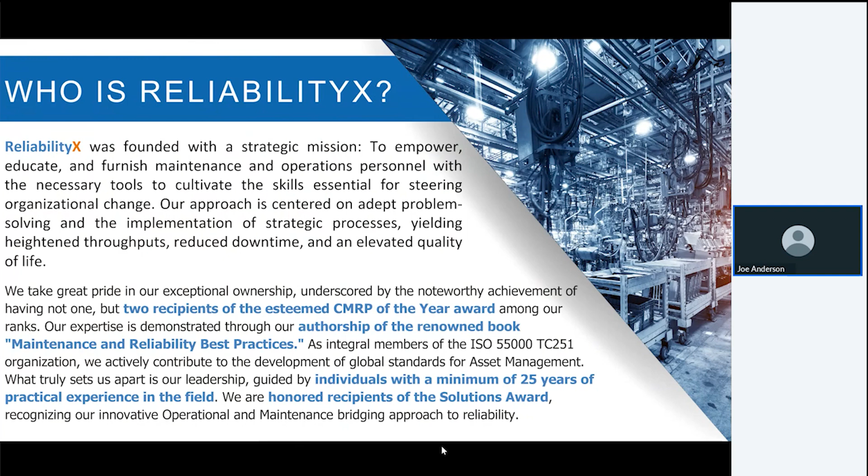So let's jump right into it. When it comes to defining terms, we're not going to solve the world's problems today. Really, you might have more questions than answers. Am I right? I don't know. I'm not claiming to be right. I'm just trying to spark a conversation.

But I think if we use tools that we have at our disposal and years of experience, we can start to see some of the things that we define and the way we define them don't quite add up to the words that we use. And so that's where I kind of want to get. I don't think we'll definitely solve it. And I don't know who's right and who's wrong. Just wanting to have the conversation.

But we've got to understand that in the maintenance and reliability space, we've kind of dug ourselves into a hole with the way that we define things and kind of created our own language and only included ourselves within that language, and that put us in a box. And now anytime we talk about maintenance, everybody only thinks about the maintenance department. And the same thing we did with reliability; now most people think reliability is a maintenance thing. And that couldn't be further from the truth.

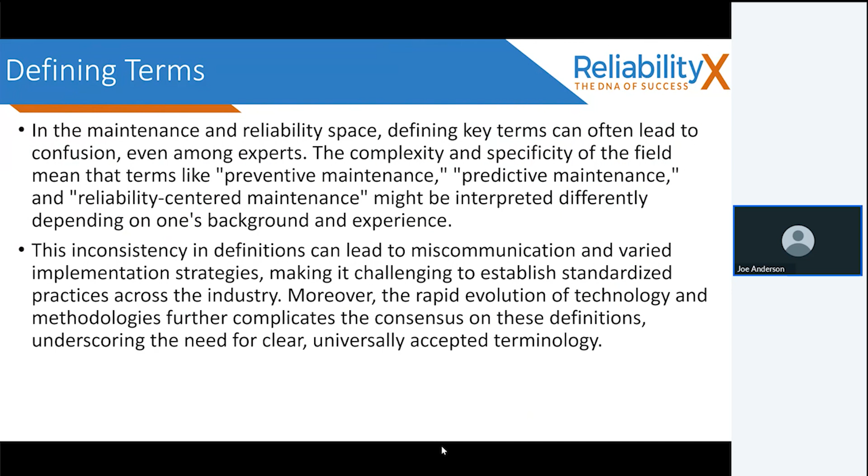And I think we're paying the price for that now, because now the market is saturated with these smart people and they provide minimal value. Not all, I don't want to use it as a blanket term, but most, for sure. And here we are, further complicates things. So again, my theory, the way that I teach it, is these smart people take simple things and make it very complex. And by doing so, that creates bureaucracy, and it stifles an organization's ability to be flexible and move.

And I've seen this now, being on the consulting side, time and time and time again. Value-added people, we take the complex and we make it simple. The reason why KISS, keep it simple, stupid, is a thing is because of common sense. The simpler it is, the easier it is to get results, and the better results you get. And for whatever reason, we're enamored with complexity, which I don't understand. But the goal is keep things as simple as possible, define things in simple terms. Doesn't need to be complex. Go out and execute and get results.

And then yesterday, 2 days ago, I was watching a video by Eli Goldratt. Goldratt wrote The Goal. He wrote Critical Chain, The Haystack Syndrome, some of these books. He taught Theory of Constraints. Phenomenal guy. But he had this quote in this video I was watching, and it kind of made me laugh.

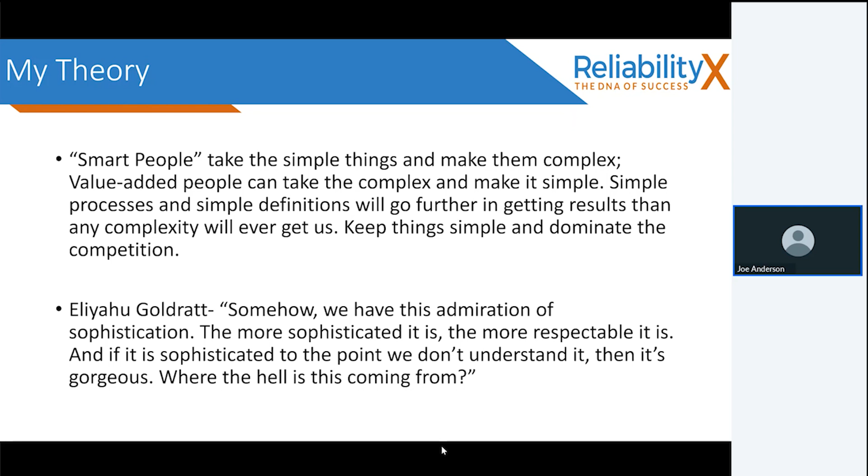So let's get into some terms. First, I'm going to start with a few acronyms. We will define these acronyms. But total productive maintenance, TPM, that is a thing. PDM, predictive maintenance. PCM, precision maintenance. PM, preventive maintenance.

Preventative wasn't a word until about 5 years ago. They added it to the dictionary because we couldn't say preventive correctly.

Corrective maintenance, CM. Time-based maintenance, TBM. Condition-based maintenance, CBM. RCM, Reliability-Centered Maintenance. FMEA, Failure Modes and Effects Analysis. OEE, Overall Equipment Effectiveness. And TEEP, Total Effective Equipment Performance.

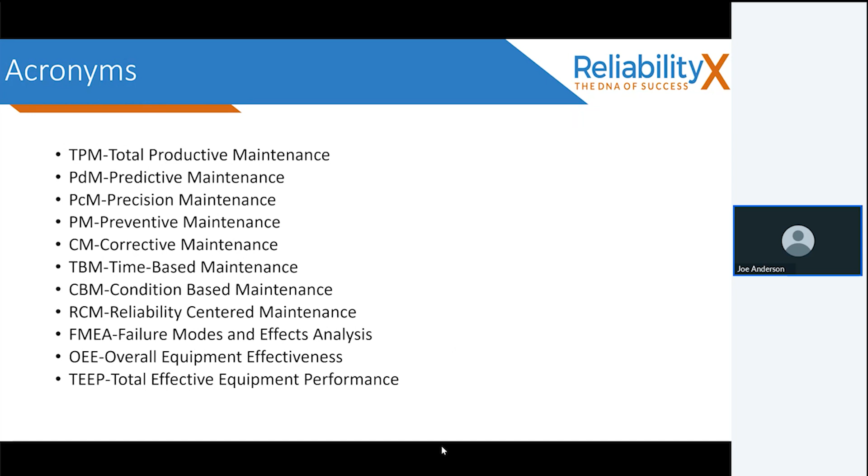So some of the basic acronyms, we're going to get into defining these, and I'll try to put a method to my madness, hopefully put it in a structure in which it can make sense. And then we'll define terms. Effectiveness versus efficiency. What is an organization, a plant, a system, a process? There's a lot of confusion around them. What is maintenance? There's a lot of confusion around that.

Prescriptive maintenance, that's a new term coming up for an old thing. Then we have condition monitoring. Some people say condition-based monitoring. Emergency maintenance and reactive maintenance. Those I'll get to, but are technically self-contradictory. Proactive maintenance, and these new ones, criteria-based and rules-based maintenance, we'll get into.

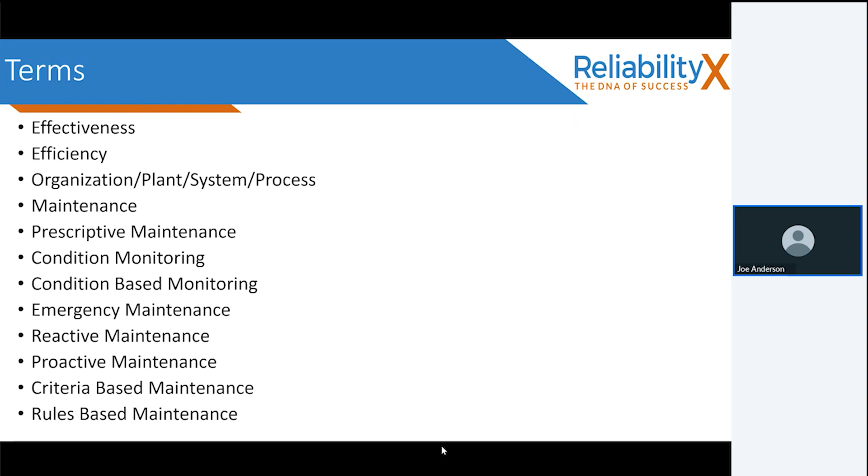All right, so let's begin defining terms. Let's start with effectiveness. Now, again, there's a method to my madness. Hopefully it kind of starts to make sense as we walk through this, but a lot of these things are related. Effectiveness, by definition, is doing the right things or the right work. It has the term right in it. Therefore, if you're not doing the right thing, it is ineffective.

Okay. And so, for example, in maintenance, do you have all your equipment documented in the system? Have you done a criticality analysis? Do you understand how it fails? How do you mitigate the failures? And what about potential failures? Those are some of the basic right things to do in maintenance. The goal is to have a strategy that's based on failure modes, and we'll get into that in just a second. So effectiveness means the right work or the right thing.

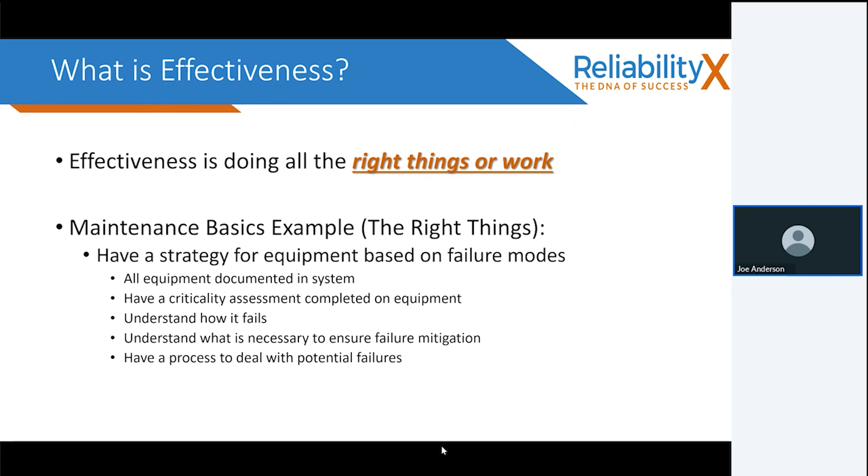Efficiency is the ability to accomplish something with the least waste of time or effort. The word right is not in the definition. And we use these terms interchangeably. We say, is it effective? Is it efficient? And we don't understand what we're really saying when we say that. Effective means, are we doing the right work? Efficiency means, is it streamlined? It doesn't mean, are we doing the right work?

I can be doing all the wrong work, and I can make that process of doing wrong work more efficient and get results. They're smaller results, but you can get results. For example, I use this example a lot. It's simple and a lot easier to understand. If I have a 55-gallon drum of used oil, and my current practice is to dump it down the drain, I just kick over the drum, spill oil all over the floor, and let's say 70% of it gets down the drain.

And I want to make that process more efficient. I could get a barrel tipper, a really big funnel, and a forklift, and I could slowly dump the oil into the funnel down the drain, getting about 99% of the oil down the drain. Now I streamlined it, little time or effort, and I got almost a 30% improvement in how much oil I got down the drain.

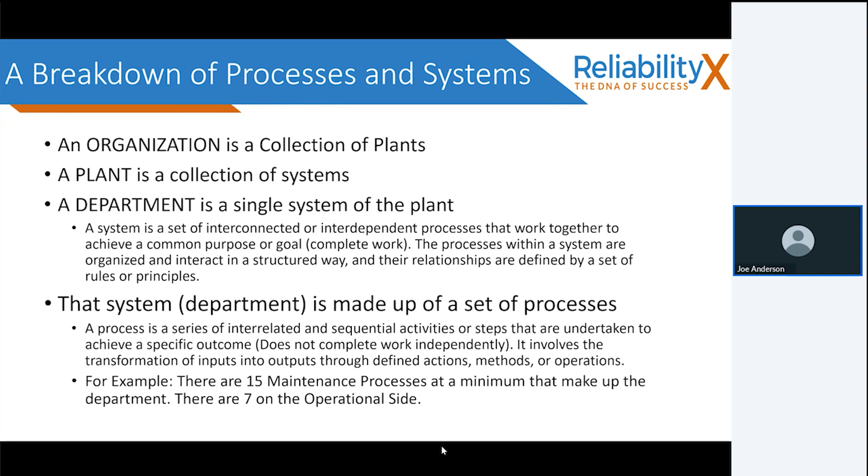But there's 15 processes. So if we think about one of those processes, planning and scheduling, does the planning and scheduling process complete work? No, it doesn't. But it helps work along in the process. So these processes work together to create the system, to complete work. They, in and of themselves, do not complete work. That is a process. So we have an organization, a plant, a department or a system, and then process. Okay. Now, I say all that to say this.

Total productive maintenance, TPM. A lot of experts in this field, and I've seen books written by them, think TPM is autonomous maintenance, which is a part of TPM, yes. But that's the operational side, or operator driven reliability, as some people call it. But they'll say that TPM is AM, autonomous maintenance, and that is not true. Total productive maintenance is a system. It touches every department. And it's a comprehensive system of equipment maintenance that aims to achieve perfect production by preventing breakdowns, process failures, speed losses, minor stops, and other defects.

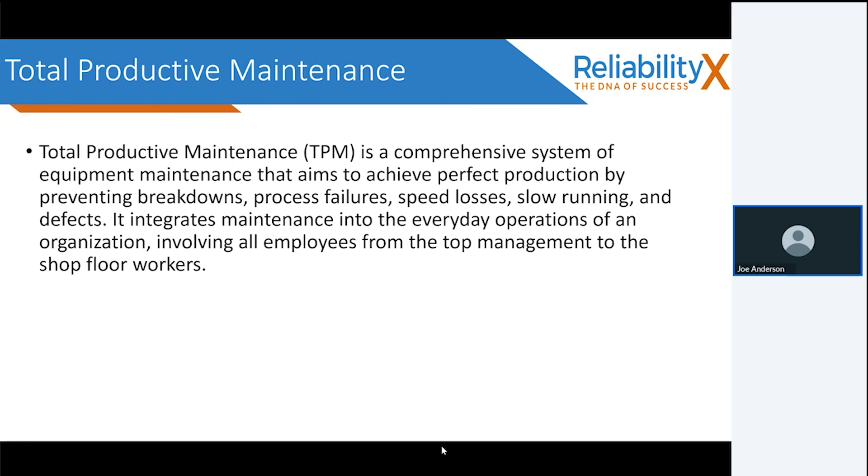The goal of TPM is to integrate maintenance into everyday operation of every single department, from top down, from the CEO to the janitor. And it does it in small group activities, and there's a pillar function. The goal of TPM is to improve equipment effectiveness. Now, we defined effectiveness, the right work. The main objective is to increase the overall equipment effectiveness of the plant, measured by OEE, overall equipment effectiveness. And then to improve asset utilization, which is measured by what's called TEEP, or total equipment effective performance.

These are measures on how effective you are at operating your equipment. This has nothing to do with efficiency. When we do the right work, downtime is minimized. It's about effectiveness, not about efficiencies. When we do the right work, defects aren't allowed in the system, which we'll get to. Okay. But these two measurements, OEE and TEEP, are the main objectives of TPM.

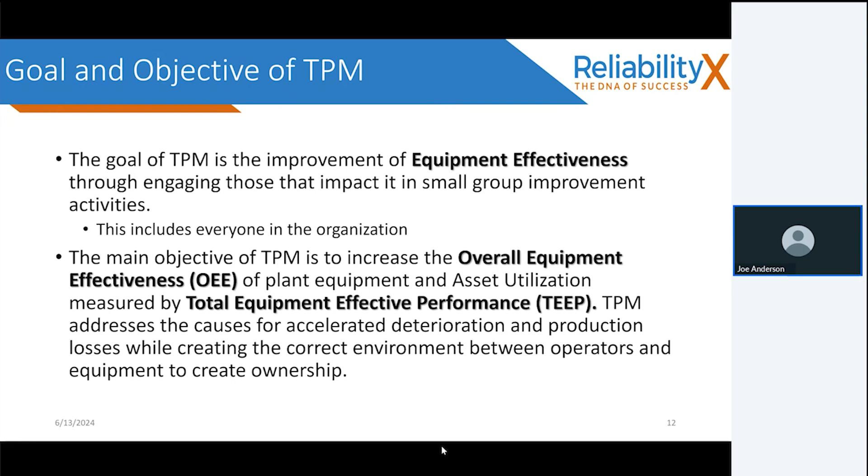TPM has 8 pillars. Everybody takes 1 or 2 pieces out of it and says, oh, I'm doing TPM. It's like, no, TPM affects the entire organization. It's not an operations and a maintenance thing, although those are the main 2 drivers behind the whole thing. Everybody has a piece. This is where we've put ourselves in a corner, because anytime we mention the word maintenance, everybody associates it with the maintenance department. But if I say, whose responsibility is safety? Everybody. Well, how is that? It's not the safety department? What about quality? Everybody. How is it everybody? It's not the quality department?

But you're telling me maintenance, and more specifically reliability, is just maintenance's responsibility? And this is how we've ended up in this situation. Okay, it is everyone's responsibility. Everybody has a piece in maintenance, everybody has a piece in reliability. But we have to define what the term maintenance means, and we'll get to that. With OEE, overall equipment effectiveness, it is a measure of equipment effectiveness against the scheduled time to run the asset or assets.

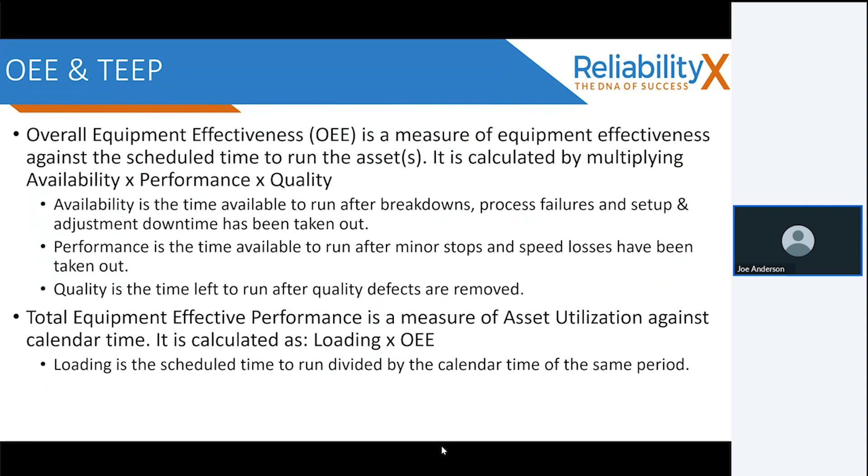Okay. With that, let's move on to defining maintenance. What is maintenance? Well, simply put, it's the act of maintaining. Well, what does maintain mean then? If you look up the root word maintain, it means to keep in an existing state, also called base condition, which means it's basically defect free. That's base condition.

It also means to preserve from failure or decline, to guard or protect. So picture a knight in shining armor standing in front of the asset, not allowing any defects into the system. That is maintaining. Not allowing defects in. That is maintenance. The act of keeping it at base condition. Keeping it defect free.

The problem is we have all these terms now where we throw the word maintenance behind it. But if we understand that proactivity and maintenance are synonyms, for example, reactive maintenance isn't actually a thing. It's self-contradictory. We have a term for that. It's called repairing. But we just lump everything together and call it maintenance. But it's actually not maintenance, it's repairing.

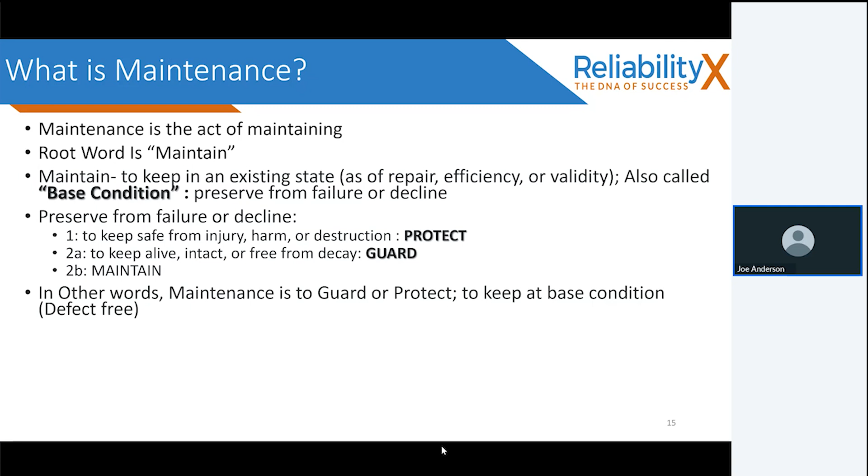Once a defect initiates, we now have to react. That reaction is a repair. Now, depending on where we repair it at, that's the question. Okay. So what maintenance is not is it's not firefighting, it's not turning wrenches.

Just to turn wrenches. Now, there's a level of it when it comes to what we call precision maintenance, but that's doing the maintenance things that are keeping defects out of the system in the first place, like using our torque wrenches, doing laser alignment, double checking our work. But all this reactive stuff that we talk about is basically repairing. But I digress.

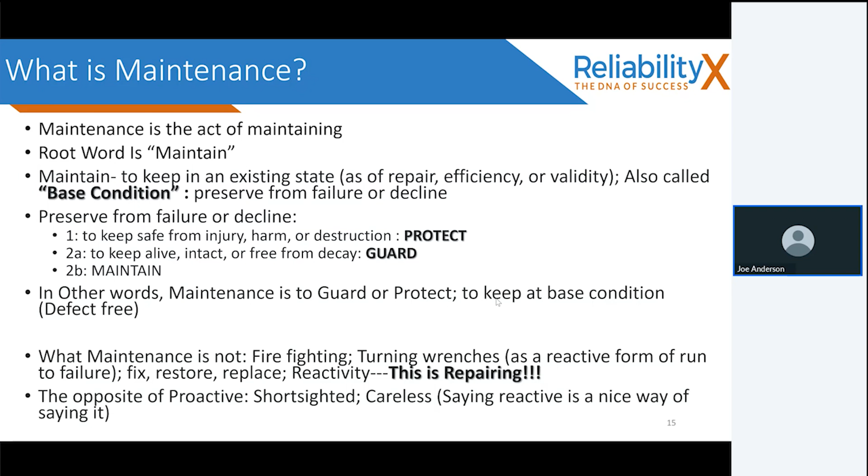So, other terms, a failure mode. A failure mode is a deviation of function or behavior. It's the effect of the failure mechanism. A failure mechanism is a deviation of condition or cause of the failure mode. Okay, so every asset or component has functions. And the way in which it can functionally fail, the cause behind that is a failure mode. The cause behind the failure mode is the mechanism.

Then you have what's called a failure code. That's an identifier in a CMMS system. A failure code: when we go to close out a work order, we typically want codes in there so we know what type of failure it was.

Proactive maintenance. Here's one where we throw the word maintenance behind it. But proactivity is the set of actions or the mindset of doing things or mitigating defects and not allowing them to happen in the first place. Are things going to wear? Yes. Yes. So there's always going to be a level of reactivity. It's not a positive or negative thing. It depends on what the percentages are.

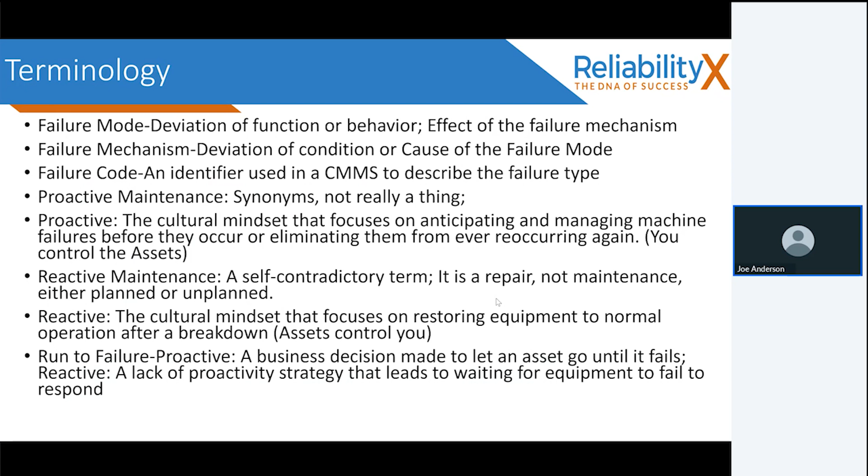Then you have preventive maintenance. Preventive maintenance is a program, and that involves all sorts of preventive maintenance activities. And I'll share a graphic, kind of how I see it. But what we typically do in maintenance, those that are reactive in nature, we do these things on the weekends. We call them PMs. It's a piece of paper that prints out that we take out to the line and

we do a PM. But typically in that PM, it's not detailed enough for us to actually make an informed decision. It's more an opinion. And we'll get halfway through a PM and we'll find something bad and we'll take the time to replace it, leaving the realm of PM and now entering what's called corrective repair.

Because our inspections say check the chain, and we check it. I think the chain's bad, so I'm going to replace the chain. Okay, but how do you know the chain is bad? Are you using a chain wear gauge? Is it 2 to 3% stretch, so it needs to be replaced, or are you just guessing?

And we spend this time and we do this over and over again. We'll get about halfway through a PM, our day's up because we replaced a bad bearing, we replaced a chain or something. Never finishing the PM, but we'll sign off that we finished it. Then Monday morning, we start up. We'll run again. Next weekend, we're doing these things we call PMs again. Never truly getting any of the defects out of our system, hardly any.

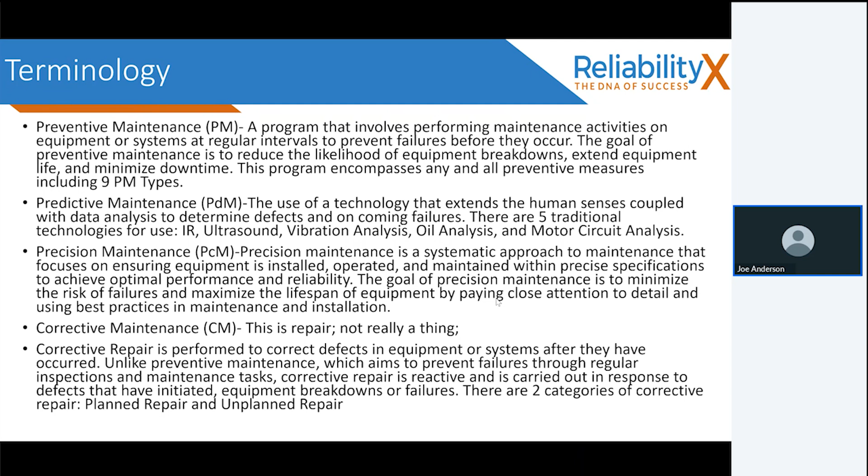Then we have reliability-centered maintenance, RCM, which is a systematic approach to identify the most effective maintenance strategies to ensure reliability and safety of assets. Okay, so again, it's not your maintenance program. It's a methodology or a set of tools that help you develop your maintenance strategy.

FMEA, so RCM uses FMEA. They kind of call it an FMEA on steroids. But FMEA is a structured tool to help you identify potential failure modes and rank them based on severity, occurrence, and detectability, which gives you a risk priority number. So you can rank your failure modes, and your higher ranked failure modes, you're going to try to address those with certain strategies.

Now, these two terms here, even amongst experts, there's a lot of debate. And there's kind of two fields of thought. Okay, but I'm going to share with you mine. Maybe I'm wrong. Like I said, I'm not here to say I'm right or wrong. I'm just telling you things how I see it. I could be completely wrong on all of this stuff. Okay. But this is why we need universally accepted terminology.

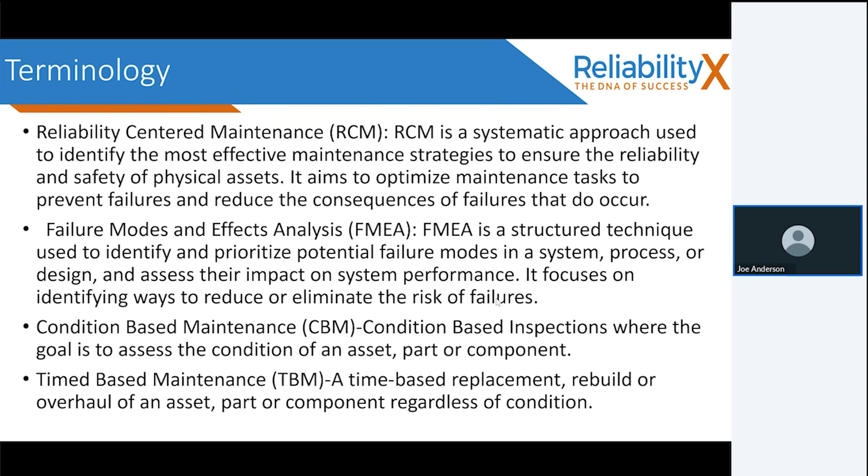And so this is how I define it. Again, up for debate. Even within our organization, we can't agree on this. So that just kind of shows where we're at when it comes to terminology. Because there's an RCM kind of approach to this, and then there's a, I don't know what you would call it, just digging yourself out of a reactive hole approach to this. But there's a couple different approaches. And so again, it's not that anybody's right or wrong. The question though is how do we define it? And this is why the discussion needs to be had.

Condition monitoring, that is where tools or technologies are used to monitor condition of an asset, part, or component. Condition-based monitoring is just another way to create confusion. It's condition monitoring. We just call it condition-based monitoring, but we already have an acronym for CBM. We can have like 58 CBMs and no one would know what you're saying if you say CBM. I think we just create too much confusion. Again, smart people like to make things complex, and they think they're the coolest people that come up with these terms, and half the time don't even know what they're saying. So we've got to be the most cool and innovative and show how smart we are. Okay, well, so be it. But I don't really see it as a thing. It's condition monitoring.

These two terms I've been hearing a lot recently, criteria-based and rules-based maintenance. This isn't actually maintenance activities, but a way that you would set up your CMMS system to make it more user-friendly so that you can start having your system work for you. Okay, but we throw this word maintenance behind it. Again, I think we throw the word maintenance behind everything to market to the maintenance world. And again, maintenance is everybody's responsibility. Everybody. But here we go, putting ourselves in the corner again.

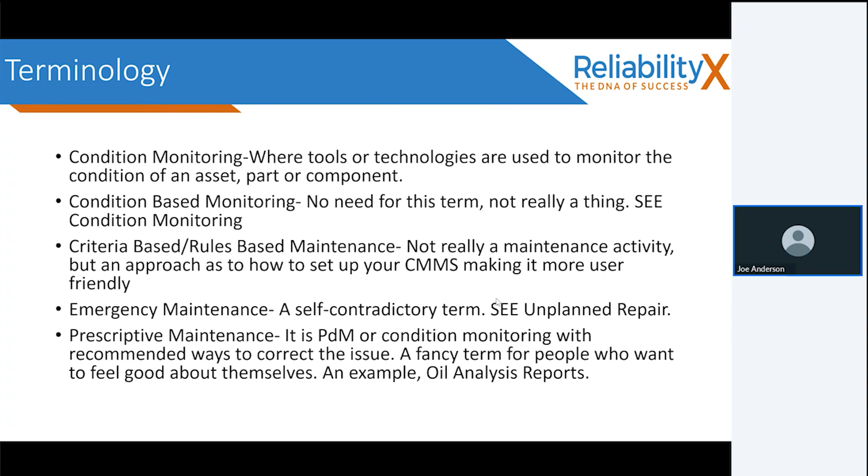So kind of the way I see things, put in these buckets. So you have preventive maintenance. This is your program, all the different types of PMs. And then you have corrective repair. You have planned and unplanned corrective repair. So you have these nine types. You have calibrations, testing. So testing like safeties. You go around, test your safeties, right?

Adjustments. This isn't really changeovers and getting called out to machines. It's more seasonal stuff or major engineering resizes because you are completely switching to a different product. Not like a changeover, but getting rid of one size product and going to another size product permanently.

Lubrication management should be its own thing. Rebuilds and overhauls should be their own thing if they're major things, not replacing certain components on a given time. That's not a rebuild or overhaul, but that'd be a time-based replacement. Recommissioning is one. So, if we go replace a pump, recommissioning, there's a precision maintenance piece that has to take place. In some industries, revalidation.

Then you have condition-based inspection, and under that sits PdM, your IoT, condition monitoring, any performance testing, or defined measurements. So using a chain wear gauge, for example, to inspect for elongation, that would be a condition-based inspection. There has to be a defined measurement. That means we're specific behind things.

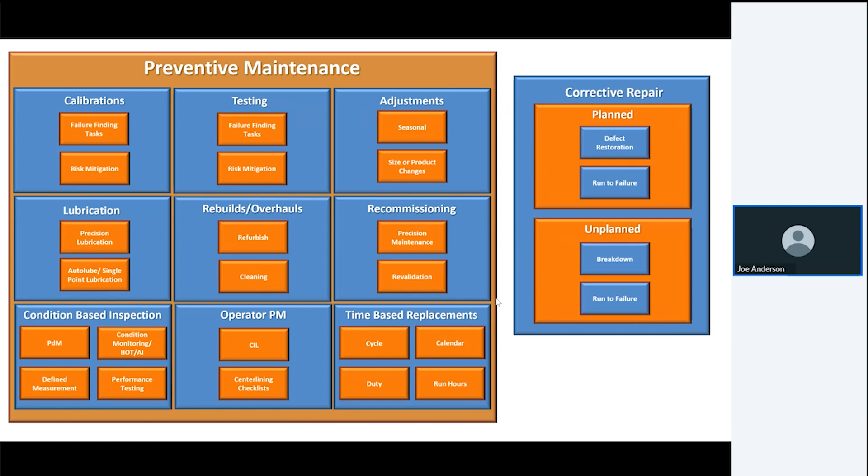Okay, and then there's a new term I learned last week called reability. This is the ability to gain again, or maybe they've just taken the lie out of reliability. If you know, you know. I'll leave that one there.

So, in closing, am I right? I don't know. It's been easier for me to explain and teach others this way. Maybe it's completely wrong and I'm off base 100%. Maybe I am. So it is what it is. But will we be able to fix this issue? Probably not. If anything, it's going to get more complex because now we have other people coming into the industry that know nothing about maintenance and are creating new creative terms, and everybody tries to be innovative.

We can't even fix a sandwich, and we're in here trying to define terms. So what I say is keep things simple. Let everybody else be smart. Let everybody else sit in a room and talk about what the terms are and all that stuff. Just go out and do. Go out and do. Go eliminate losses and defects and go get results while everybody else sits in a conference room and talks about it, and it'll change your life. Honestly, it's that simple. Go out and solve problems.